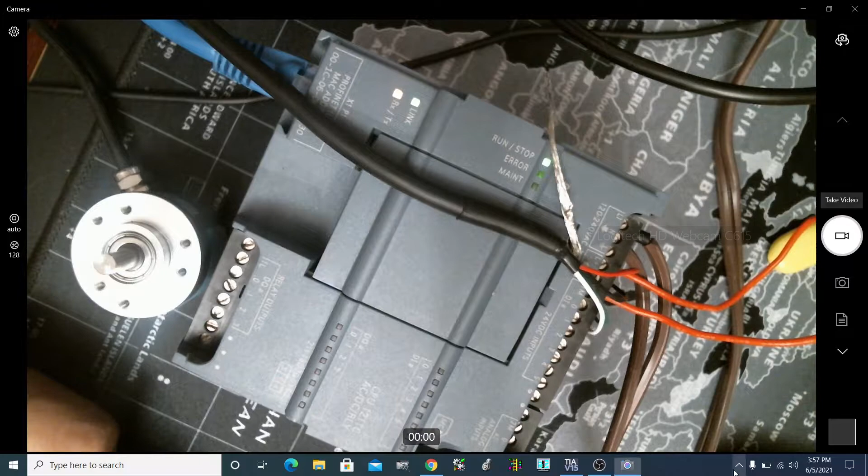Let's go to the camera side. As you can see, my PLC is connected via Ethernet over here. Let's go to the wiring side. As you can see on the wiring side, my red is connected to 24 volt, black is connected to 0 volt, green is my A, white is my B, and I jumper 24 volt to 1M over here.

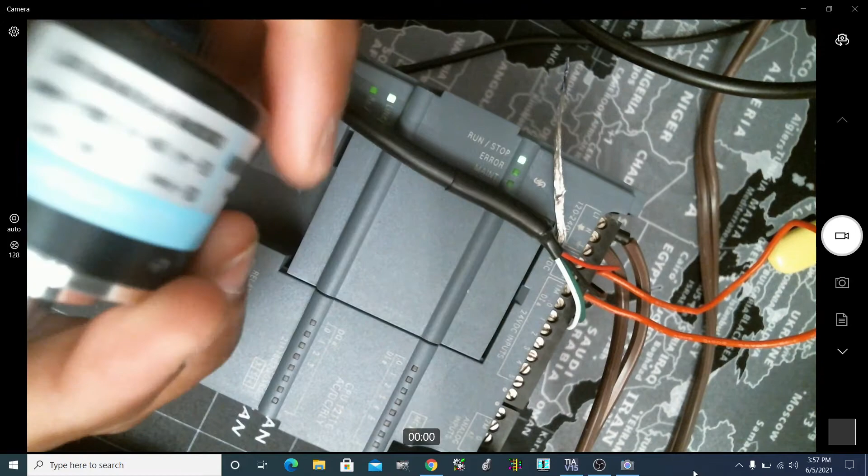This is my encoder, and I ordered it online, so I had to pull the data sheet to see which wire is which, and I'm gonna show you that. This is my encoder, which has 600 P/R, which is single phase 600 pulses per rotation, and the connections are like this. Green is phase A, white is phase B, red is 24 volt, and black is 0.

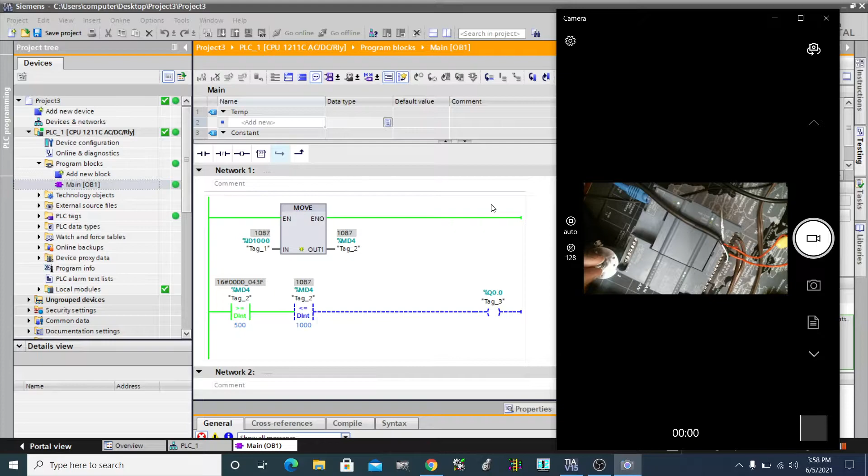As we know the wiring now, let's see if my encoder is working or not. When I'm spinning this, it's changing the value, so it means it's working. So I'm gonna minimize this, and we're gonna create a new project from the beginning. You need to go offline first. You create a new project. No, we don't want to save the old project as we are building it from scratch.

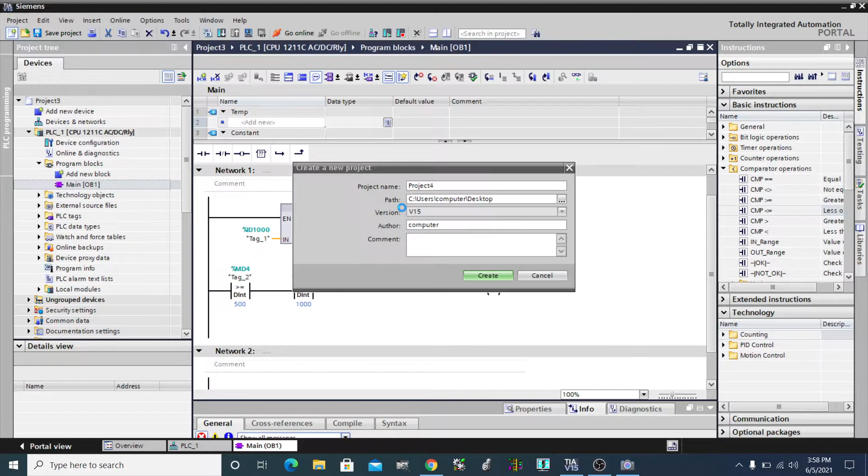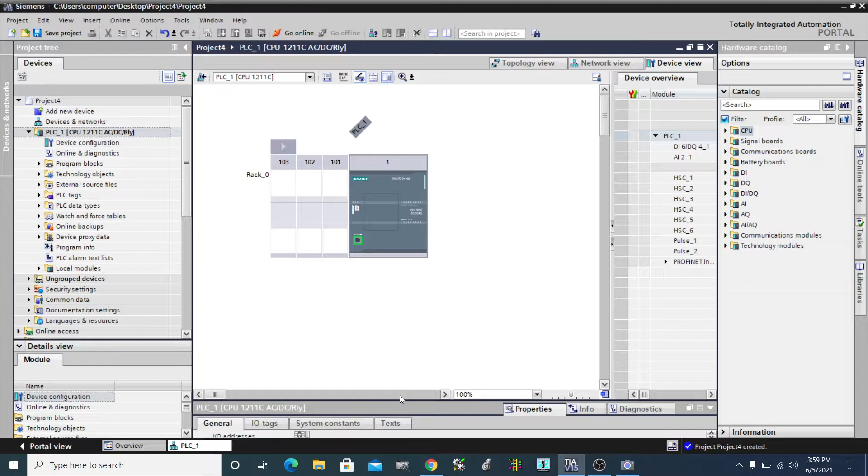You double click on add new device and select your PLC from this list. Once you select it, your PLC will appear over here. You double click on your PLC. Under the general tab, under high speed counter, I'm selecting high speed counter 1. Go to general and enable your high speed counter. Go to functions, and instead of single phase you select A and B.

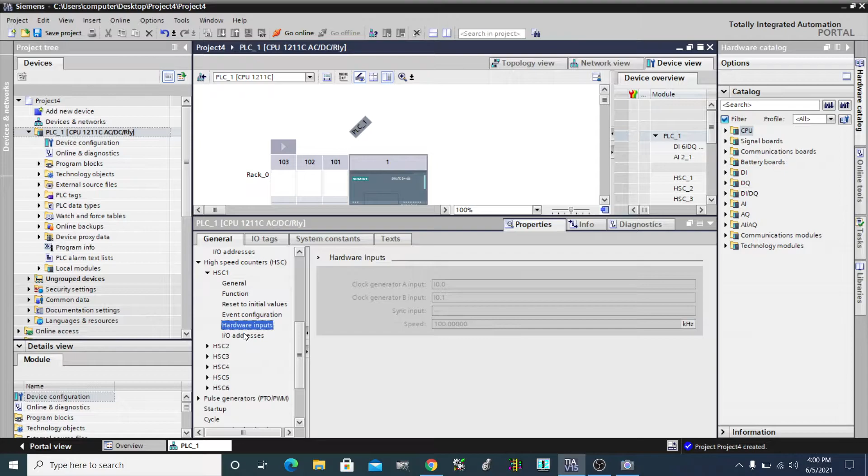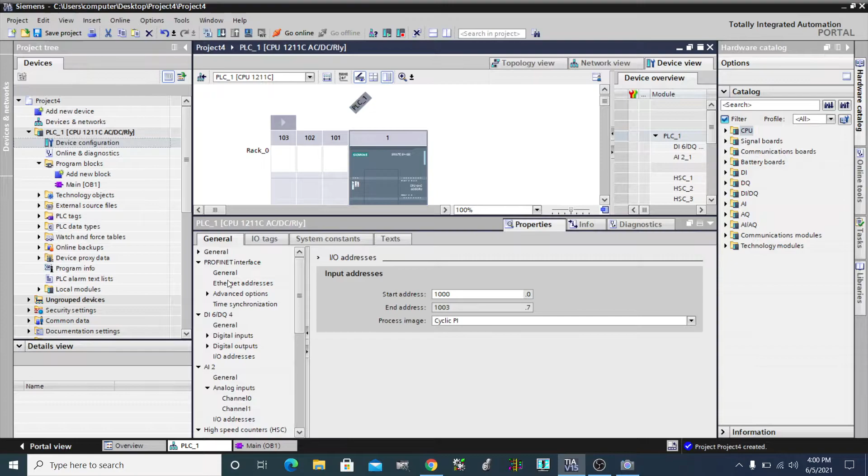On the hardware side, you can see which inputs are connected to it, and the IO address I can see is 1000 for this counter. One more very important step: you need to make sure your IP address is exactly the same as your PLC has. My PLC has an IP address of 192.168.1.30. Now I go to the main block.

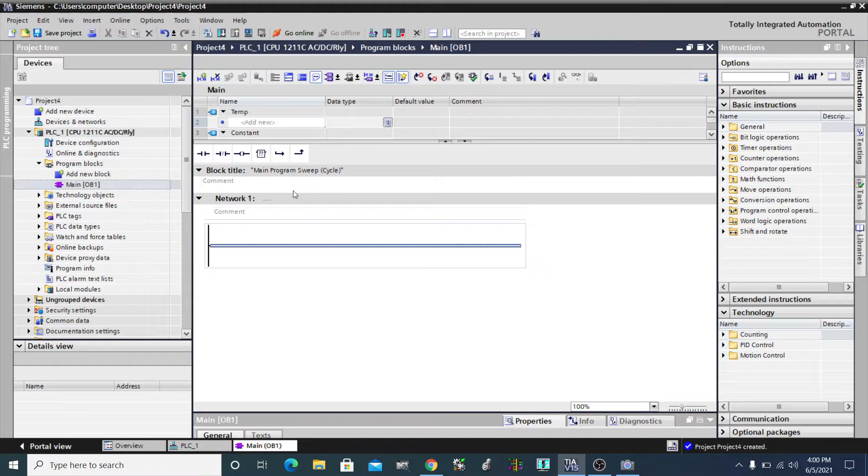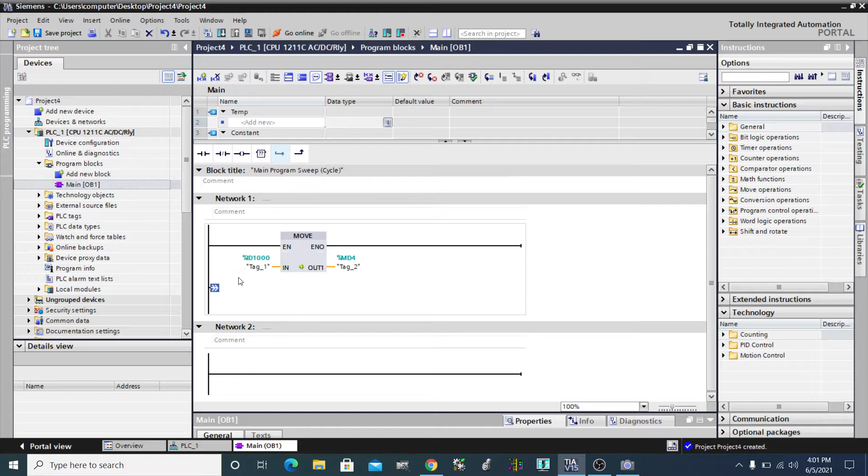I want to choose a move instruction. As input, I want to put ID 1000 as my high speed counter. On the output side, I'm going to put MD4. You extend a branch. And over here you're gonna select AND. You're gonna select here the output of MD4.

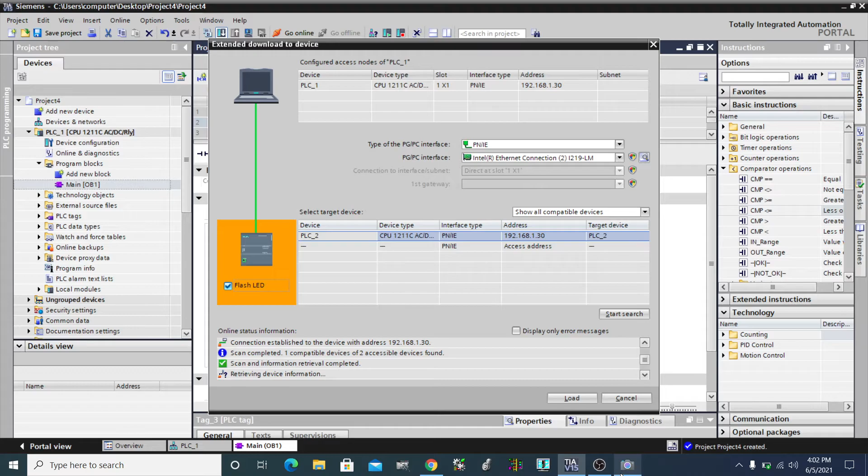Alright, over here I want to make sure when my counter value is above 500 and less than 1000, I want output 0 to turn on. Let's try to download it. Search for your PLC, and when you are in industry, make sure you are selecting the right PLC. For that, you select flash LED, and your LEDs will blink like that. So you want to make sure you're selecting the right PLC. You load the program.

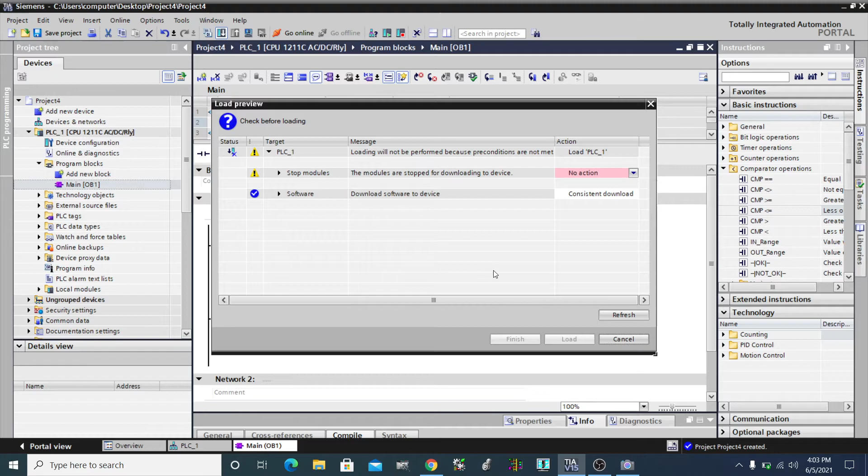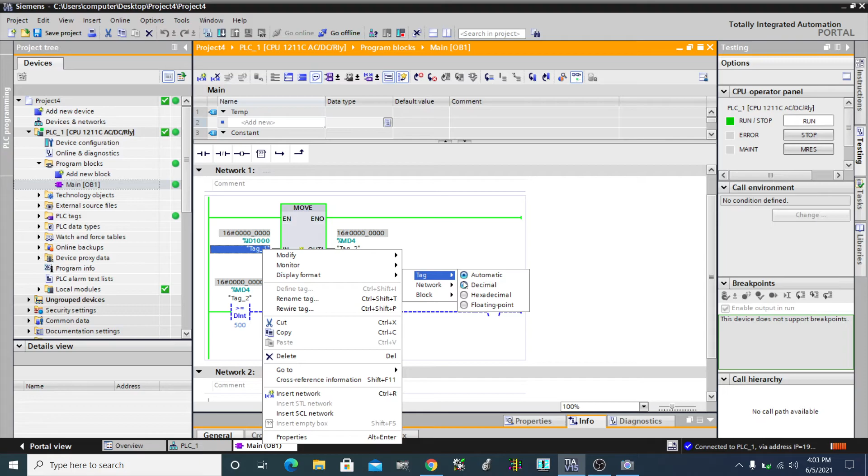Once you are online, you select monitoring. Now I can see everything is up and running. I want to make sure my tag is showing as decimal to show the visibility when we're gonna move our encoder.

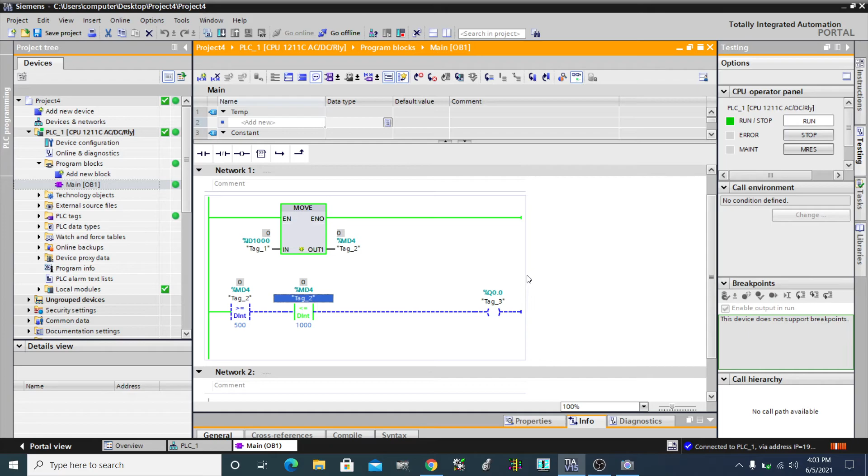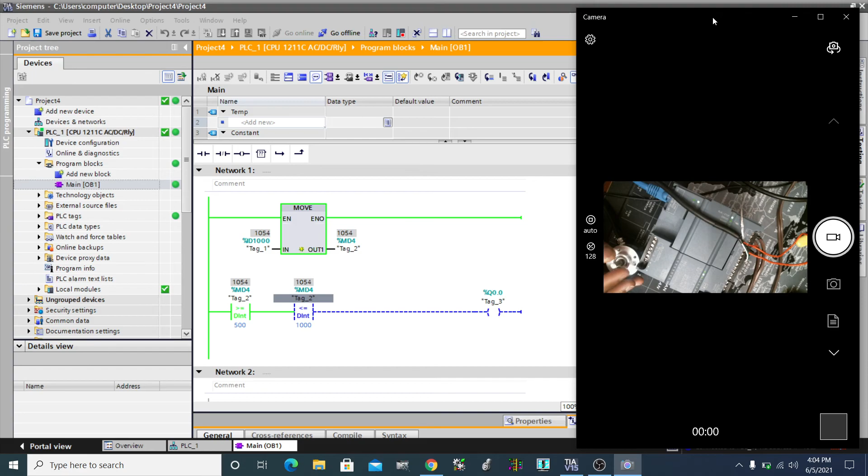And now when I'm gonna move this, as you can see, when I'm above 500, my output turned on, and when I go above 1000, it shuts off. Let me make it bigger. You can see the output over here. So it's that simple to go online and test your encoder with the S7-1200.